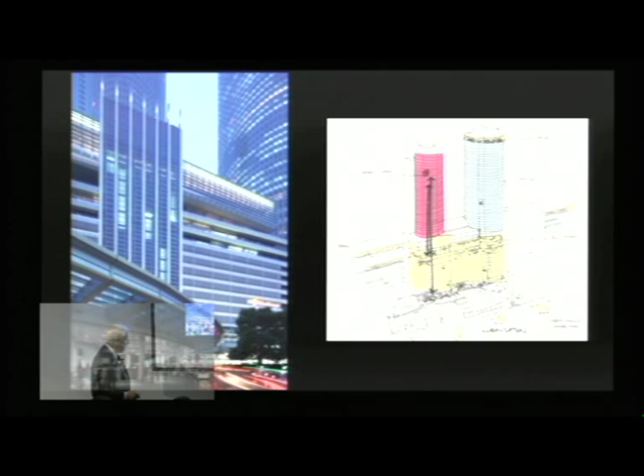Hotel, office—you can see the elevators as they rise up and down in the lower podium. The Sky Street is really quite impressive; people come up just to enjoy the view, and it connects the restaurants and the hotel and office. It's always quite active.

This castle was rebuilt in 1959, but originally completed in 1612. It was burned in a fire and they had to rebuild it. Note the change of scale between the two time frames. This is obviously the tallest building in Nagoya, which unfortunately was totally bombed in World War II, and the only building left was the station. When we were asked to do this project, we had to take the station down and then rebuild this building.

Other buildings we were doing in the States, moving around, were important ones for our career. One was the Federal Reserve Bank in Dallas, which we did in '92. Something rather interesting about this building: we completed it in a record time frame and saved about $25 million for the federal government.

I was on stage with the head of the Federal Reserve—what was his name—Greenspan. He doesn't have much of a sense of humor, because I said that we had just saved the federal government $25 million with the completion of this building, and I was sure they were going to give it back in tax breaks. I looked at Greenspan and he totally ignored me, never smiled.

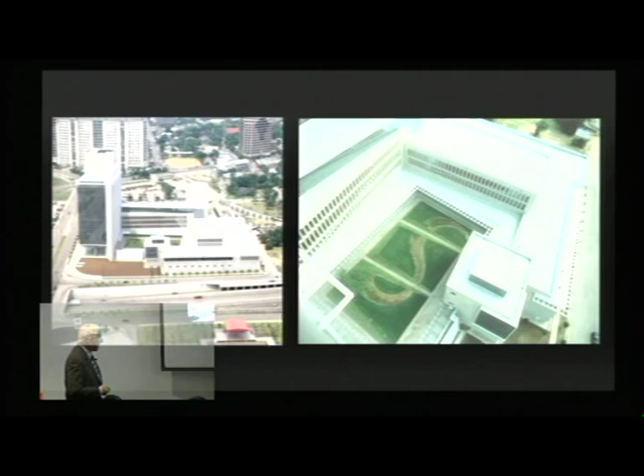One of the most exciting projects for us was winning a competition for the World Bank headquarters in Washington, D.C. We competed originally with I think 20 or 30 firms, narrowed down to 9, then narrowed to 3, and we were fortunate to win. The reason we won, I think, was really twofold. One, most of the entries were in classical architecture, because in Washington, D.C., that tends to be the way most buildings go. But because this was an international bank with a lot of third world country members, they didn't want anything classical, but more modern and international in style.

Two, there were two existing buildings, one by Bunshaft and another by Vincent Kling, that we were able to save. In building the new construction, we were able, through our structural and mechanical systems, to fit in 130 feet, 13 floors, and provide ceiling heights of 8 feet 8 inches, which is pretty amazing with a raised floor. The reason we could do that: we used post-tension construction slab, and all of the air, light, and power were done vertically. Every 5-foot module, you can tap in for air, water, and electric.

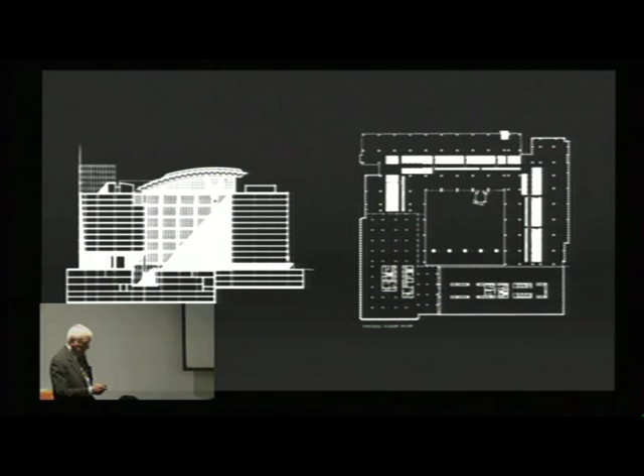So we won the competition, and this building looks like this. It's 4 buildings wrapped around what was an open courtyard, which is being closed. These were the existing buildings we saved, and this is the new construction. You can see these very long linear cores with all of those utilities I mentioned, which allowed us to have the higher ceiling heights with 13 floors.

The central atrium is quite amazing. It's 150 feet cubed, and when you're in this space, you feel good even by yourself. When they have great parties or great gatherings, it's equally exciting, and people enjoy it for lunch or just sitting in this space. What it really has done is bring together the 170 nations that make up the bank. This is where they meet, interact, and develop friendships with other bankers, so it works extremely well.

We do a lot of corporate headquarters. Besides IBM, which I didn't show, that Brett mentioned, there's Gannett's and USA Today's headquarters in McLean, Virginia—2 separate companies, although one owns the other. The buildings are designed so the circulation is to the inside, so you'll see each other as you circulate. All of the common spaces—cafeteria, meeting rooms, newsrooms, et cetera—are shared for both companies, so we get a lot of interaction and exchange of ideas.

The roof surfaces are also planted, so they're used actually for meetings and social events—very green as it looks out over the countryside. Then the main stair leading up to the newsroom is also a work of art, sculpture, and it really is the feature of the lobby.

Mr. Mori, who is the client, is one of the most visionary clients I've ever seen. This man never talks about budget, never talks about profit loss. What he talks about is what he's going to contribute to the city of Tokyo or any city he works in. He's most concerned about the quality of the environment you build and the quality of the place you create, and what he can do to help cities like Tokyo, his hometown, become even better. These are the kind of clients you really want because they really care about what they're building.

And if you've been to Japan, I'm sure a number of you are, the quality of construction is second to none. I always joke, but I'm serious, that Japanese contractors make bad architects look good, good architects look great, and great architects like God. And it's true. If you do a good building, it's going to look better than ever.

I always say that to achieve a great work of architecture truly is the hardest thing you can do. I don't know of anything that's more complex, and I'm going to explain that in a second. But this is an example of a really phenomenal building. There's that whole museum, art center, observation gallery, et cetera, and then the lower retail here.

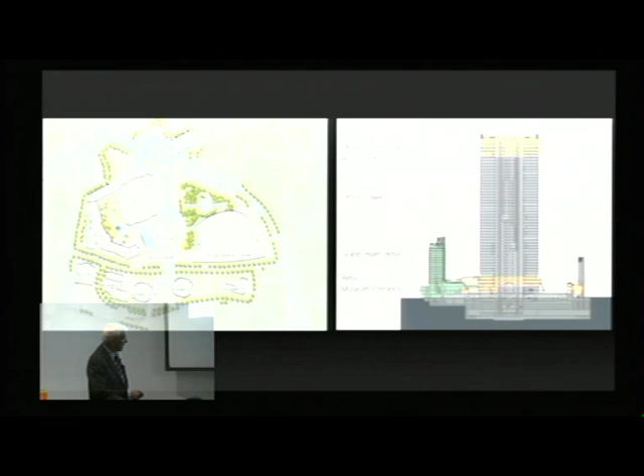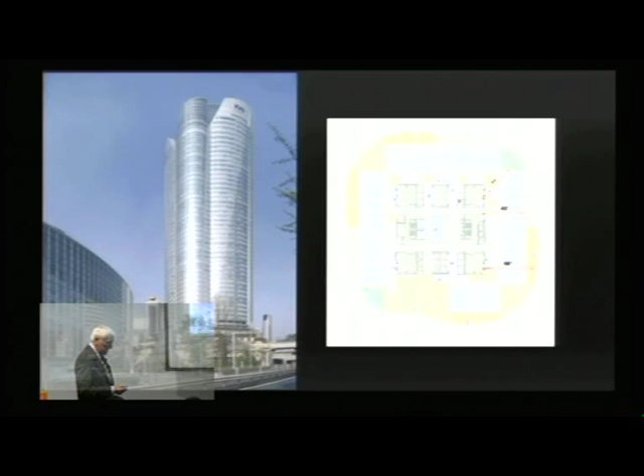This building is a city within a city. Major tenants like Goldman Sachs are the tenants of the office building. But people love living here and enjoying this place, which attracted 42 million visitors last year. Now, if you put that in perspective, Las Vegas attracted 38 million. And they don't have a casino here. This is strictly some retail and theaters, et cetera, and the museum.

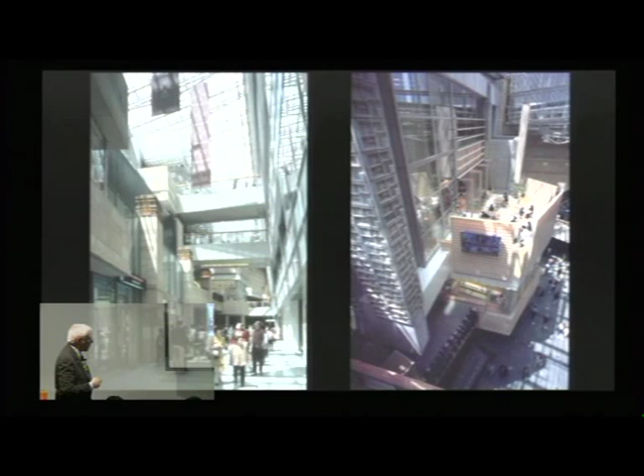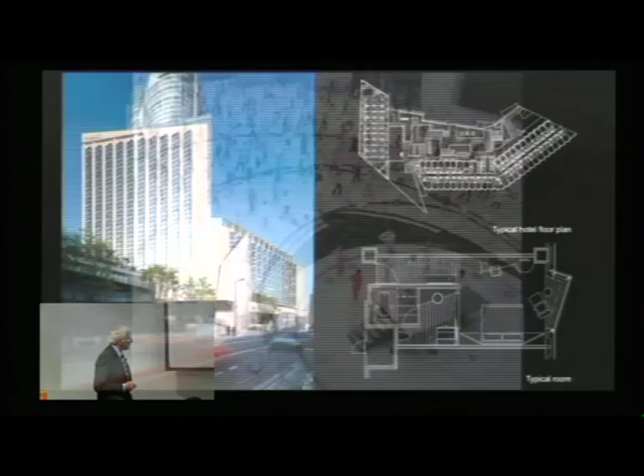And lovely, the retail has restaurants extending out of the hotel and over the shopping. So the whole experience is quite exciting. They even have this great central place that's used not only for Tai Chi, but for theater, for interesting discussions, for even demonstrations. So it's a great public space. And the hotel is truly a terrific experience. It's a Grand Hyatt, which has some of the best beautiful rooms and public facilities of any hotel ever.

Okay, getting back to my talk about what's important about creating great buildings. Just, can you imagine, I'm sure many of you will face this soon, all the forces that you're going to come across and face when you try to do a piece of architecture.

Imagine a block of clay, absolutely smooth, okay? Square. And then start to think about the forces that are going to start to shape it. First is your client. Clients have attitudes, ideas, needs, program. That's got to affect it, right? Second is going to be the city officials, the zoning, the city's view corridors here in London, historic buildings that one needs to respect. They start to punch that clay a bit, and shave it because you got to have this view and you got to reduce this height.

Tough. English heritage can be very difficult, and so was CABE, but they all make it difficult to get buildings approved. Now add to that the other issues. You've got hundreds to thousands of people who actually work on these buildings, not only the team of architects and engineers, all of whom contribute, restrict, limit, or add.

Then you have the contractors. If the contractor is very, very good, as in Japan, you're probably going to get a terrific product. But if they're not, we have some in the US who love to cut everything short, make more money, save money, and change the details, or try to substitute the material by being delayed, and then when you need it, it's too late to get what you want.

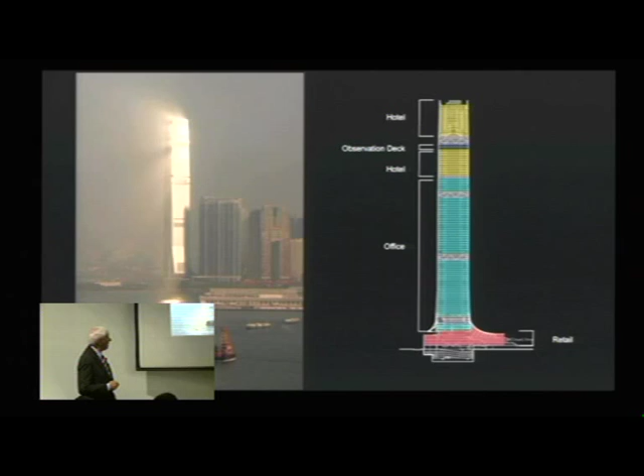The skin is rather interesting. It's like a shingle, and it overlaps, which does two things: it creates great interest, but it roughens the surface, so as air moves across it, it's slowed and doesn't have the same impact down on the street as if the tower had a flush skin. It's also like a dragon, and this is a dragon's tail that leads all the way down to the subway, the retail, and the train system. So you come out of the tower, down to the retail, and eventually into the train system.

And the developer had Cesar Pelli do this one. We did that, so these are goalposts across - the entrance to the harbor is now marked by two giant towers. This one is slightly taller.

Other projects we're doing as part of this global work involve working in the Mideast. The ADIA headquarters is still considered one of the most beautiful buildings in Abu Dhabi on the coast, and one we're very, very proud of. It's for their investment company.

Jumping back and forth here, the airport should have come next, but it'll come in a minute. Heron Tower here in London is being completed for Gerald Ronson, and this is one that we've done. It's going to be an excellent building, with beautiful cross bracing and stainless steel covering. The structure makes for a very rich exterior in contrast to the masonry here.

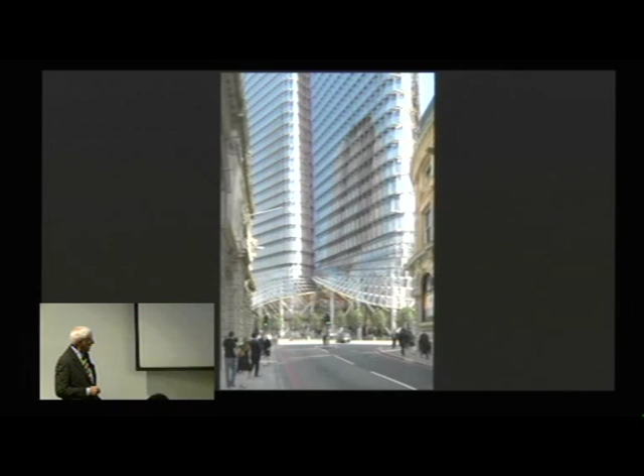Underway now is the Pinnacle, which will be the tallest building in London. It's quite sculptural, as one can see, next to Norman Foster's Gherkin. This also has a shingled skin, a bit more complex due to the geometry of the building, but a very rich surface, also roughened by that shingle effect. You see it on the skyline, and it was approved as part of a tent-like shape - so from tent zoning, this became the pinnacle, the key point on the skyline.

At the same time, we were working on diversified locations. One thing we decided we really had to pursue was other types of buildings. Just doing office buildings is fun and exciting at times, but your team gets a little bored with the same kind of building program - the shapes become more important than almost the program. And obviously working in different countries is fascinating, but we felt it was important to do university work, educational work, hospitals, airports, et cetera. So we began to look at other opportunities.

In New York, our first big chance came to do a university building called Baruch College. Now, in New York you don't have a lot of space to spread out - this campus is in this building and one other. It's four different schools tacked in here, plus below ground - that's Bill's original sketch - there are all the sports facilities: basketball, swimming, and so forth, as well as theaters. Then there are several university or college departments tied vertically through this building with escalators and elevators.

Each one of the schools has its own bit of atrium, which means where people can gather. But the key was we wanted that south light to come through the whole building, and you'll see that it does. So some shots of the school - this is 800,000 square feet of space under one roof for the students. You can see the kind of light and space that's been created for them. That's the main entrance, and actually from here you can see through the building to the skylight and the light, the sun above.

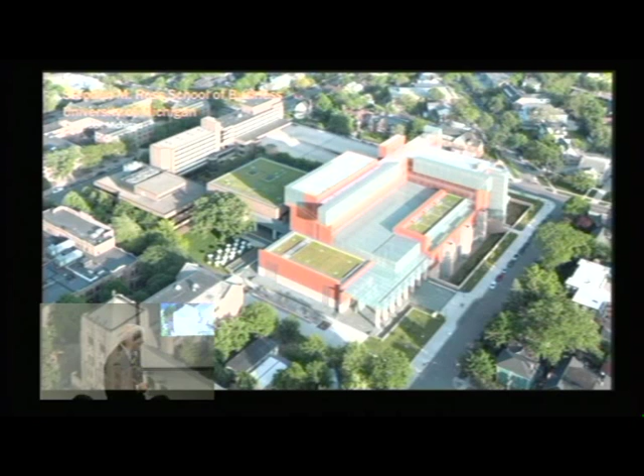We've just finished, at University of Michigan in the U.S., the Ross Business School, for which the developer donated $100 million. You don't have that in England as much, but in the U.S., many schools are supported by donations from private individuals. One of their graduates gave the money to build this school, and it's a very modern business school that relates to the use of brick, terracotta, and glass, like many other buildings on the campus.

This is the most popular space on the University of Michigan's campus, where students can eat, meet, and work, and their classrooms surround the space. So it's a very active place for meeting people.

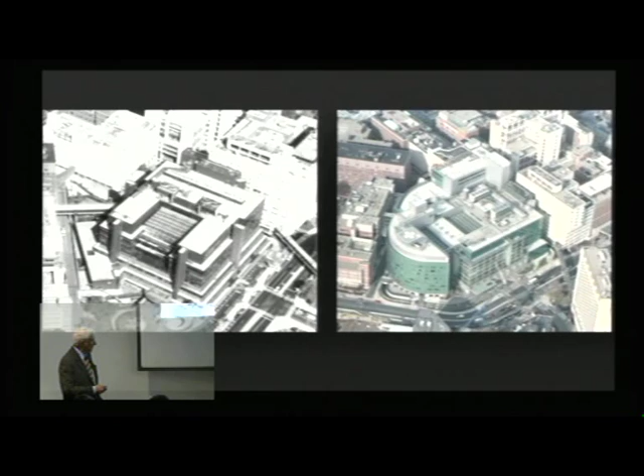Hospital work - the Children's Hospital in Philadelphia. All of this is new construction around an existing building that looked like this, for really sick children. Most of these children do not recover but are treated here. This whole new building has been built around it and changed its character. Because we could not replace the exterior wall behind this glass, since that would require removing the wall, these children couldn't be moved out of their rooms. We built an atrium and created this new surface you see here. So the rooms were here, and that wall we couldn't take down, so we built this whole new wall outside to create a great space for them.

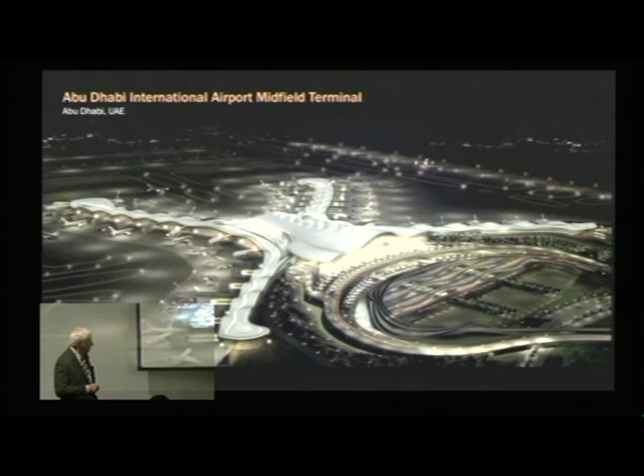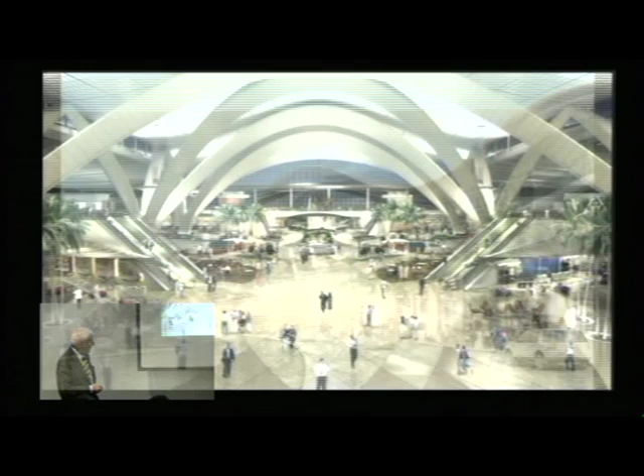And his greatest accomplishment, the Abu Dhabi Airport, which is soon to start construction. I think it's a fantastically beautiful place - it's going to be one of the great airports in the world and one of the great places to go. Even if you just fly through to see the airport, it will be quite an experience. We're very proud of this, and hopefully it starts construction this year.

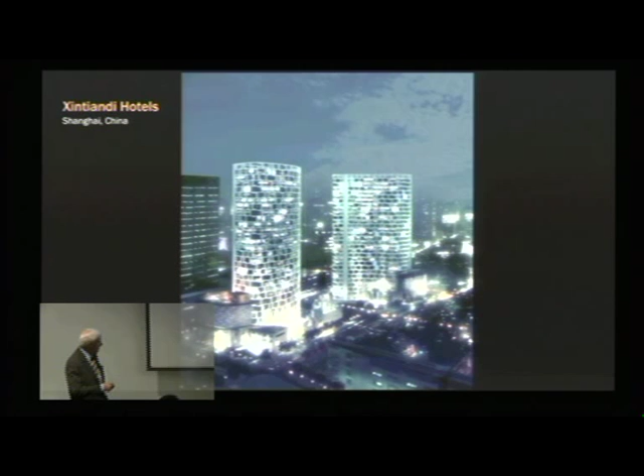Hotels in China - some interesting ones we've been doing with these screen-like effects on the wall.

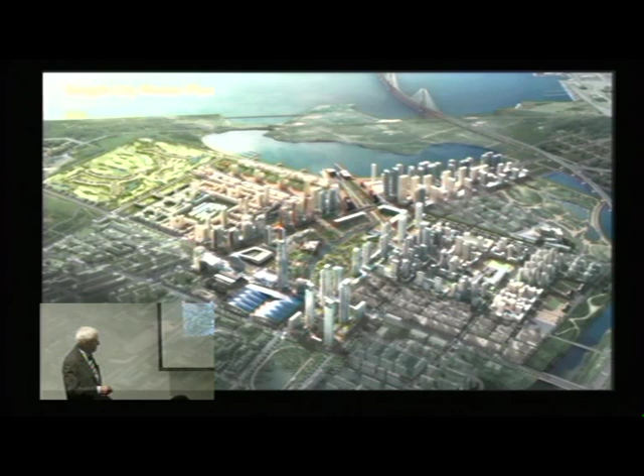I'm going to move a little quicker. We've also done a new city in Korea called Songdo City - it's 150 million square feet, built on 1,500 acres, that does this. It's already well under construction. These are real buildings, not models.

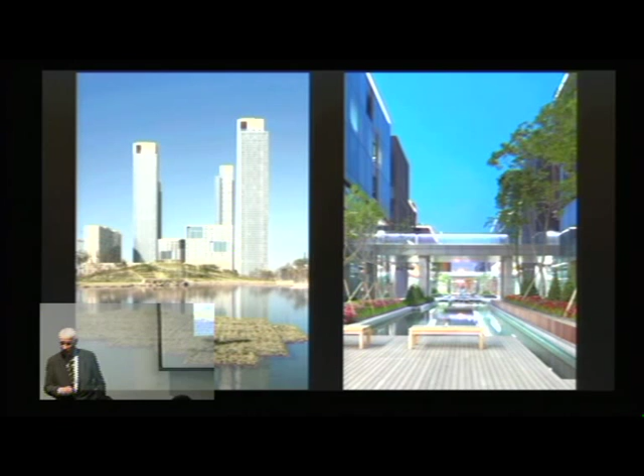Some of the housing is quite wonderful. A lot of Korean housing were just a series of similar slabs, and the only way you could tell the difference was the number. Through this variety of towers, low-rise, and mid-rise, we're able to create a much richer texture for housing in gardens, including even canal housing, which sold very well. By the way, this whole unit sold out in one day - 2,500 units, with 60 buyers for every apartment. A pretty popular place.

New convention center, which we've done, as well as the Central Park being built as part of this experience.

And some new towers underway, a little more sculptural than the other work - these are office buildings and are underway now.

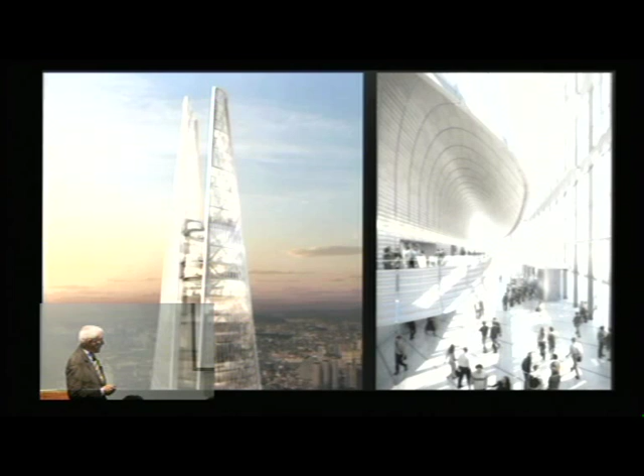Also for Lotte, a super tower. I won't spend a lot of time on this, but this will be the tallest tower in Korea. Lotte is a candy company and wants to really have a piece of candy on the skyline.

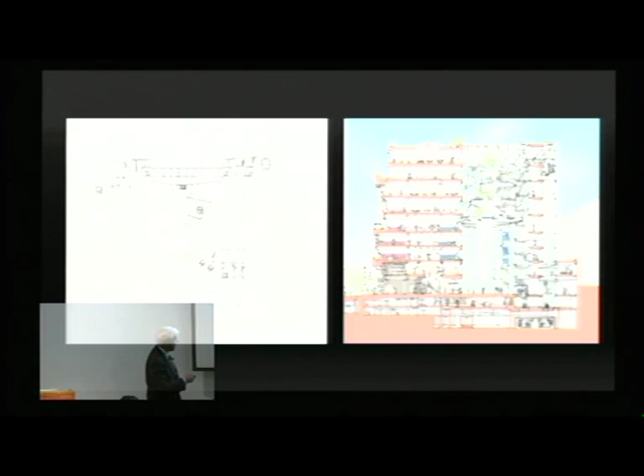Unilever decided just a few years ago to stay here instead of moving. When they did, John Bushell of our office designed this, redesigning the entire floor, making it far wider than the original plan, creating a bridge that had the elevators at this point, and a series of what we call flying carpets, with a great atrium running through the building.

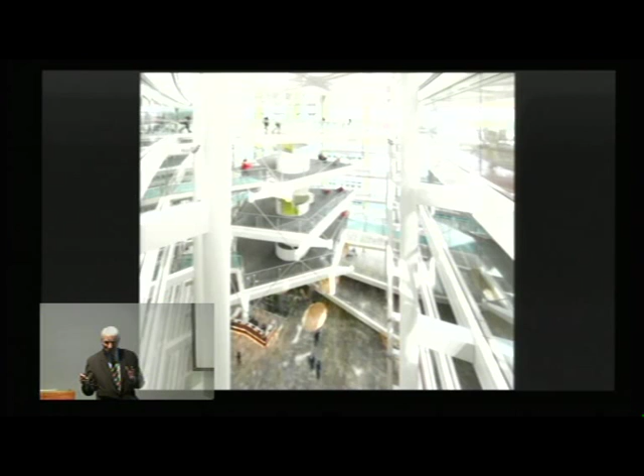Let me show you, this is the traditional entrance that they weren't even using. Now we use it. You come in that entrance and you hit this space. You come through a traditional classical wall, beautifully done in masonry, and you come into a space that just absolutely blows your mind.

It is so exciting and cheerful and daylight and transparent, both vertically and horizontally. You see across people working in their spaces in a very effective way, with great views of the city line. This wall was solid in the original building, with a few punched windows. We took it down and made it all glass, and look what you see. Pretty amazing, right? Conference rooms.

This company, Unilever, has changed the way it works. It used to have all enclosed offices, narrow corridors, very dense, to one of the most cheerful and open spaces you could have. We had a great party here last night, and when the weather's good, you go up on this deck and see St. Paul's, the skyline of London.

Great place. Okay, quickly, we have firms at KPF in New York, London, Abu Dhabi, Hong Kong, Shanghai, and Seoul, and we move our people around. Depending on their skills and the projects we have, they move from one office to another to work on those. There are obviously people based permanently in each place, but we do like to move people and help them both get new experiences from their location.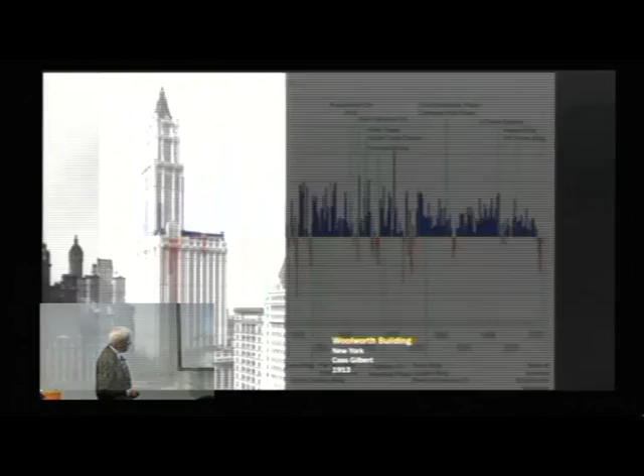The Woolworth Building was finished in 1913, before the Depression, so the times were good. It's a very elegant building, beautifully detailed, with wonderful materials - an expensive building for its time.

The Chrysler Building finished in 1930, but remember, the crash started about '28, and this building was designed and constructed before then. So the bold decision was to build it. It finished at a very bad time in 1930 and remained empty for quite a while, as did the Empire State Building, which was finished in '31. There were no tenants, I think, for almost 10 years in that building. And they had other nicknames for this building other than the Empire State.

This architecture, this place, is as popular or more popular today than it ever was, over 80 years later almost. The rents are extremely high. People always stay here, never want to leave - it's just a great location. One of its features is that great skating rink, which makes it very popular winter and summer, because you also have dining in the gardens when the skating rink is not there.

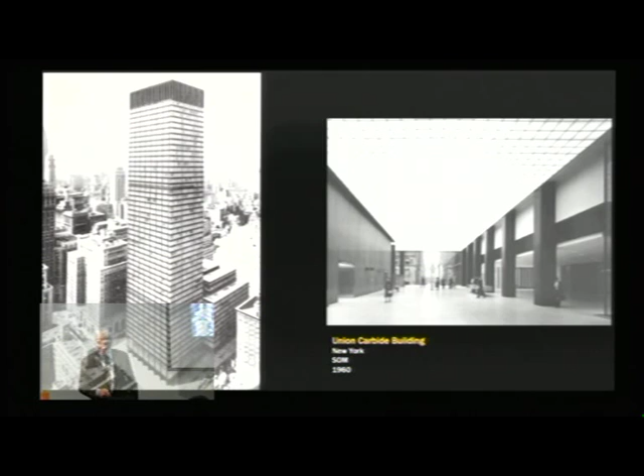Union Carbide, another great building finished by Skidmore in a good period, 1960. It was unique for the 60s buildings that were to follow, because this was a very handsome piece of architecture and still does exist - it's now J.P. Morgan's headquarters.

But in '63, Emery Roth finished this building, which Belluschi actually had started as a design for Pan Am, at the end of Park Avenue - one that received a lot of criticism because it really blocked that whole avenue by its full width. A very bold building, kind of very concrete, heavy, and bold in its design.

But a lot of the buildings that started to happen in the 50s and 60s in New York were these inexpensive curtain wall buildings that seemed to just cover the whole thing - roof, sides, floors, everything. I'm joking, but they really were very inexpensive, cheap buildings. I call these buildings built by statistics - the efficiency, the amount of square feet, the cost per square foot, everything was by the numbers. Nobody really thought about architecture. I don't even think the bankers looked at what they were financing. So these were some of the worst buildings done in New York at that time, and there are a whole slew of them.

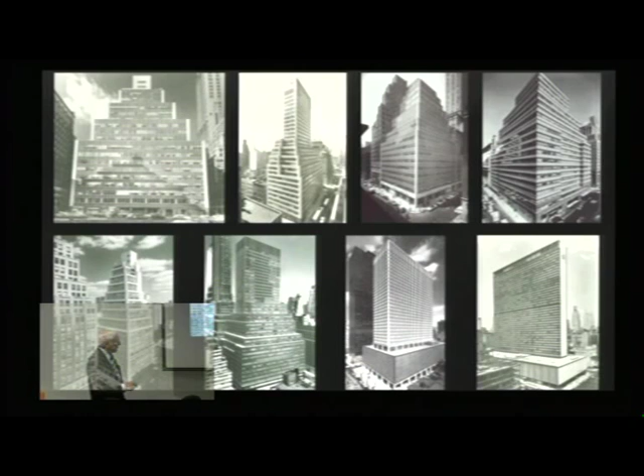They just fulfill the zoning requirements, all these wedding cake setbacks - such a contrast to Lever House and Seagram's. But they all occurred in the 50s and 60s, a really tough time for architecture.

Rock Center continued to grow, but not in the same quality back in '60 to '69. These buildings on 6th Avenue are big slabs set back, not particularly friendly to the street.

Skidmore did this wonderful building in 1970, the John Hancock building, one of the first mixed-use buildings in the world. It has retail, offices, apartments, and a great lookout tower above. Really a terrific building, one of the first to use great cross bracing that saved a tremendous amount of money as it resisted the wind through external bracing rather than through the core and the rest of the structure. A great building, done at a very good time at the end of the 60s.

People were starting to care more about architecture. Jerry Hines, as a new developer, hired Philip Johnson, who you never would have guessed to do a spec building for a developer, but did this wonderful project called Pennzoil in '75. It's still one of the favorite buildings in Houston. Citicorp by Stubbins in '77. Some really good buildings happening at this period of time, still one of the best buildings in New York.

But then in the 80s, this is where I want to get—there are two periods of time when exuberance and overdone happened. In the late 80s with postmodern, people were very wealthy. Developers were competing with one another, trying to outdo each other in building the best building. And the best building became one that had the most elaborate things happening, materials that were extremely rich, stone that was very deep in its dimensions, recesses. Philip Johnson, probably more than any other architect, led that movement and did some very successful buildings, but not always great buildings in my opinion, though certainly ones that became very popular to the consumer and really sparked things. Some of these spaces up top just didn't work, but they became fascinating tops in the skyline.

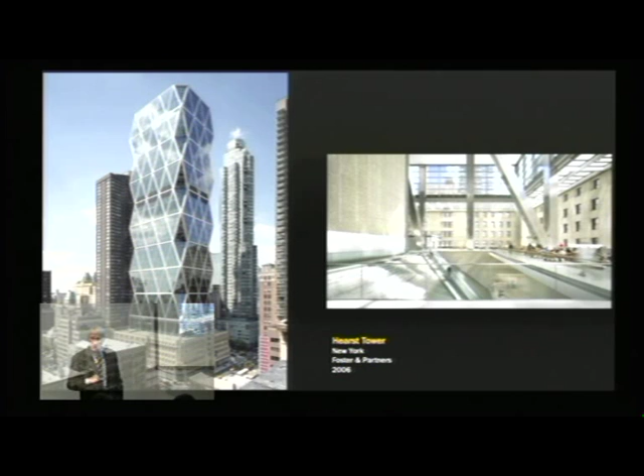But in good periods, like now and up until now, buildings like the Hearst building that Foster did—I've personally never been as excited about the combination of this base with this tower. I thought Norman could have done a much simpler building, but it does read well on the skyline, and it's very popular in New York, with a wonderful entry to it.

Or this one by Piano, which is a very handsome building for the New York Times. Only one comment or criticism here: these screens are obviously for screening the sun, but they happen to be on all four sides. So if it's right for the south, can it be right for the north, east, and west? Obviously not. So you're spending a lot of money and energy for something that only works on one face. But beautiful building nevertheless.

And then Frank Gehry - you know you're getting near the end of the good times. This was designed before it was finished in 2010. You're taking what is a very normal, simple apartment building in New York and creating something far more interesting but costly, and you know you're getting near the end. This was designed in 2006 and finished by then.

Okay, last point I want to make. With the economy, when it gets very good, people spend more money. And when they get toward the end of the period, they spend too much, and you know you're getting to the end. And then it reverts back. Buildings done just after the recessions are the simplest boxes, because all the developers have been burned and they can't get financing. So we're going to do very simple, inexpensive buildings. And you watch the buildings coming out of this recession - they're going to be a lot simpler than the ones just finished in 2007, 8, and 9.

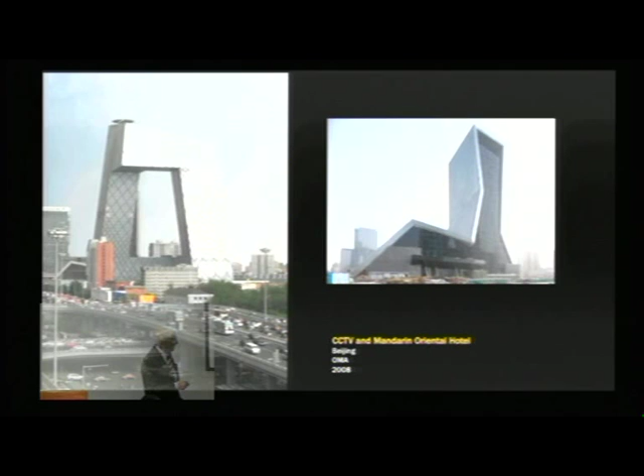And then Koolhaas's CCTV. I happened to see this when it was being built, and the structure behind here is so dense that it's hard to imagine anybody sees out of the building, because that cantilever is enormous. And remember, to get out of the building, you have to go back to fire stairs all the way back here. So this cantilever is quite amazing. While it's a great shape on the skyline, the cost of this is staggering, and you don't really see out of the building too well. But nevertheless, a very fascinating building.

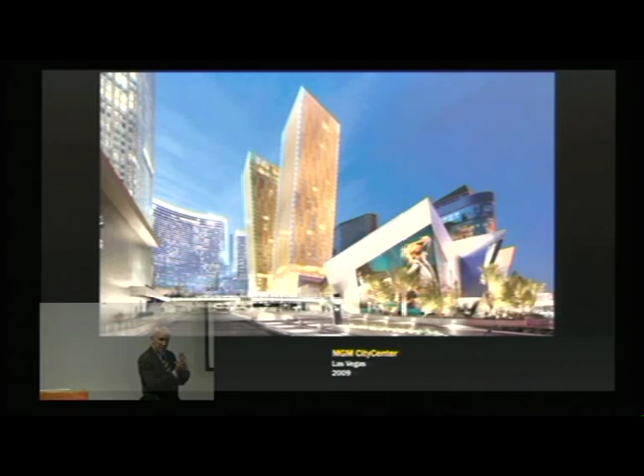In MGM in Las Vegas, between Libeskind's retail - Helmut Jahn did these two towers to relate to Libeskind. They're tilting away from each other to provide views. We did the Mandarin, but that happens to be straight.

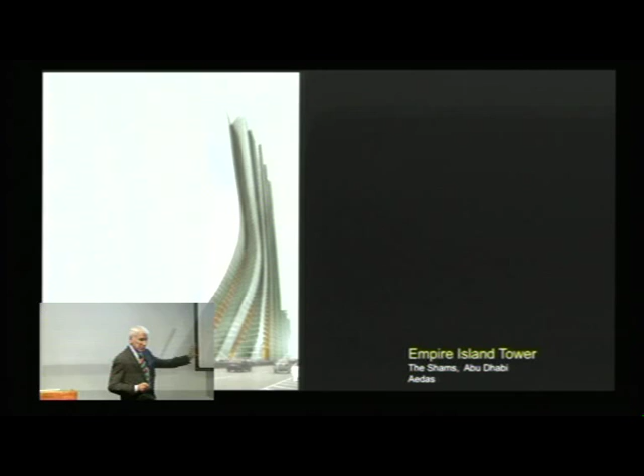Or this one, really - it looks like great snakes or worms coming up, and I would be scared by this one. And they're a good firm - I hate to pick on these firms, but really, these things...

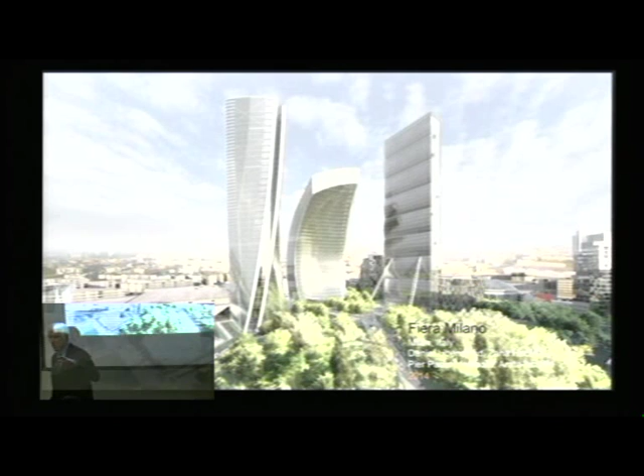Architecture becomes silly. This isn't about architecture, that's just iconic forms, right? Now there are some good architects working here, so I won't be critical of the architects, but I have trouble with buildings that do that. If you walked around all day like this, that's what that's doing - you wonder whether the floor is flat or tilted. Does the floor tilt like that? How does that actually work? And why? It's just because it's form and it's composition.

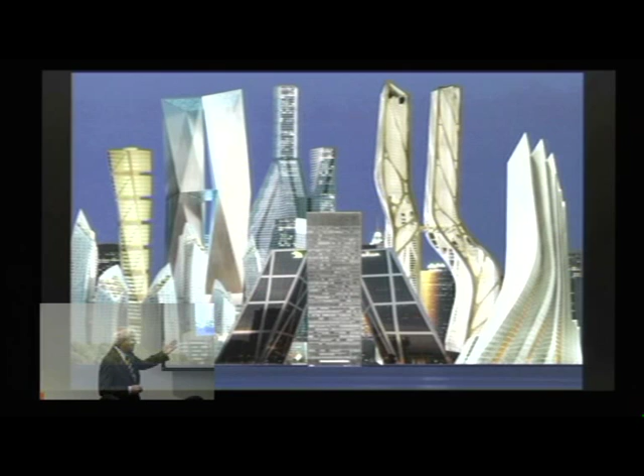But now compare it to what we're doing here. These buildings are starting to slope, right? Sculptural. Tell me what you started thinking about this cityscape now. The Mies building looks pretty good in that group, doesn't it? But you know, you could end up with a city looking like this, and so you say to yourself, which would you rather have? I kind of vote for the right, but I'm not sure how you all think.

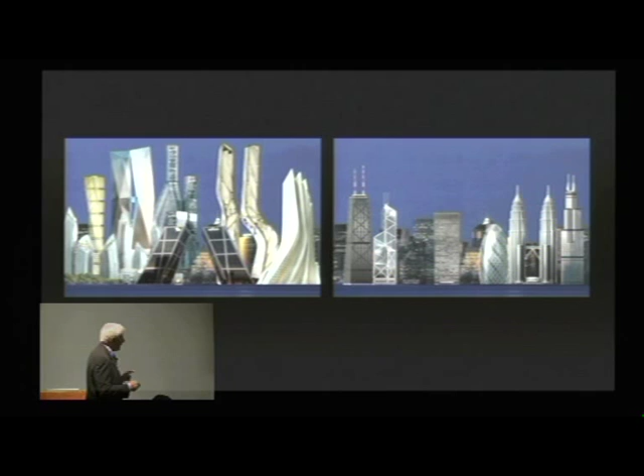But unfortunately, these forms start to dictate architecture, and to my mind, they just ignore function, ignore budget, and some other good manners. So anyway, I end on that, and I can take a few questions. Thank you for being very patient.